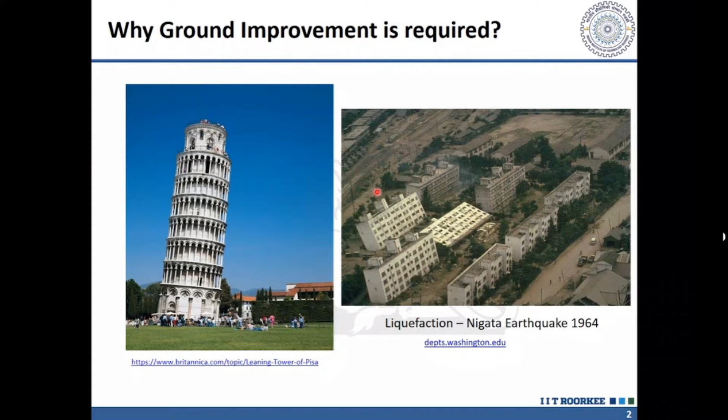We know that in the present day, the best buildable lands are not available. So whatever sites are given to construction engineers are either filled-up sites, low-lying waterlogged areas, wastelands, or creeklands. Another thing is that we are going for high-rise buildings nowadays, so the design loads are high, not only in the case of buildings but otherwise also, and the site is often situated in seismic zones.

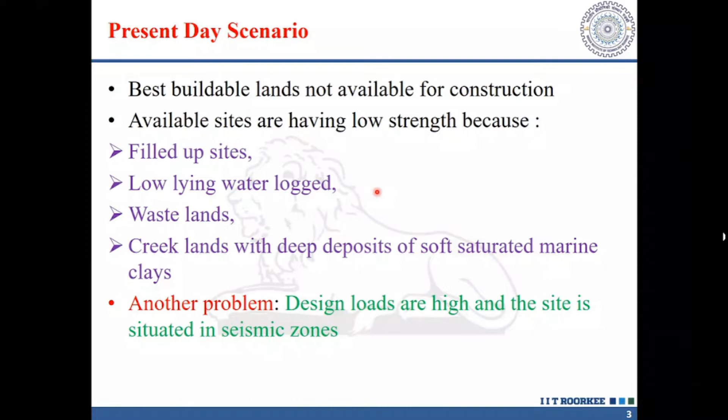So what are the options available to us engineers? Either we remove the poor material at that particular site and replace it with more suitable material, which is going to be expensive, or we bypass that particular site laterally by changing the project's location, or vertically by use of deep foundations. So you will either have to go for deep foundations or avoid that particular location.

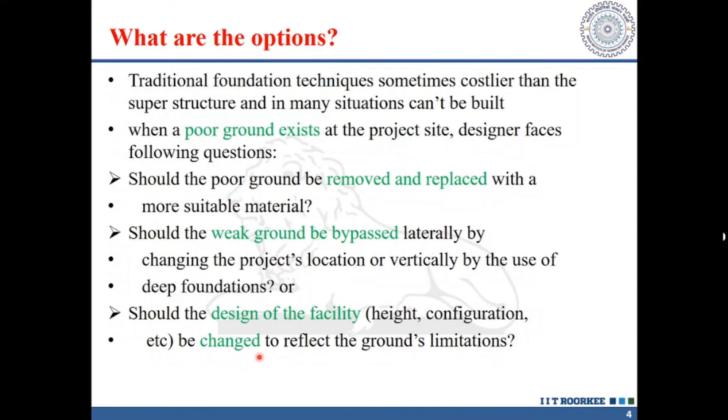And that is not possible because land is not abundantly available, so we will have to construct the structure at the same location allotted to us. Now, should the design of the facility, like height or configuration, be changed to reflect the ground limitations? These are the options available.

But there is another option, which we call ground improvement techniques. That is the fourth option available, and it is to fix the poor ground, meaning improve the properties of the ground and make it suitable for the project needs. So that is the fourth option.

Now, if we are using this fourth option, we will have to decide about the fixing tool. Here, fixing tool means there are a number of options available for improving the ground condition. Out of those options, which particular option should we go for? There are critical issues associated with all the options, because all options cannot be used everywhere—they will depend on the site conditions.

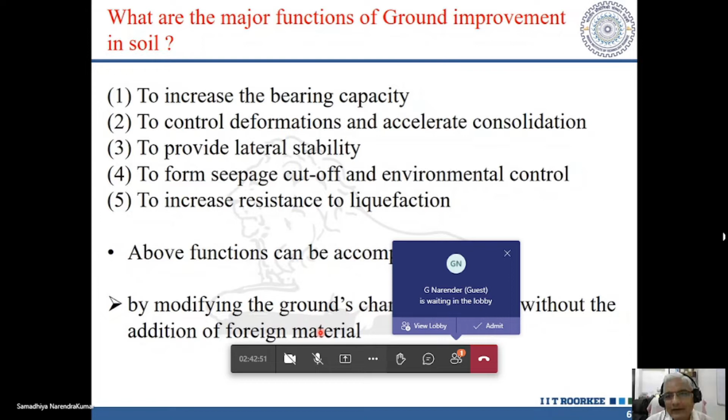There are various methods, and the function of these ground improvement techniques is to increase the bearing capacity of soil, to control deformations and accelerate consolidation, to provide lateral stability, to form seepage cutoff and environmental control, and to increase resistance to liquefaction. This particular FDP is about geotechnical earthquake engineering, and in a major way to increase the resistance to liquefaction.

Now, all these functions can be accomplished by modifying the ground's character. It can be done with or without the addition of foreign material. Sometimes you will have to add foreign material into the ground, or whatever is existing can be improved.

So there are various methods which are available: densification, consolidation, weight reduction, reinforcement, chemical treatment, thermal stabilization, electro treatment, and biotechnical stabilization. Out of these, I will be discussing some of them.

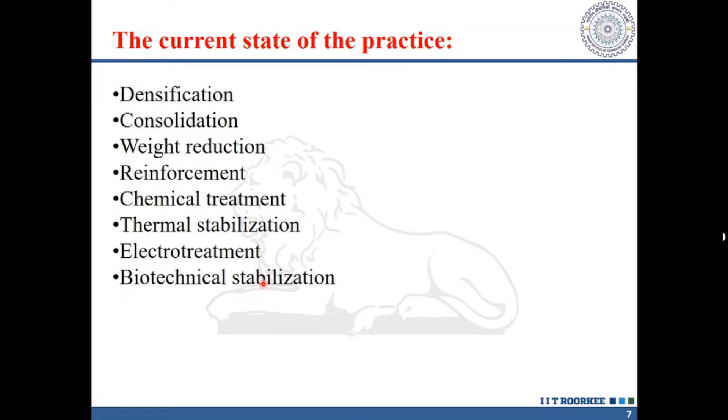Now, the very old method is ground improvement by densification. This is a very old method, and we know about this. We can go for static compaction or vibro compaction, dynamic compaction, or even in the case of loose sands, we can go for blasting or compaction grouting.

With this, the key issues related to densification are mainly the percentage of fines in the soil, because that will decide which particular method should be used, and the ability of the soil to dissipate excess pore water pressure. Especially in the case of compaction grouting, if the soil happens to be soft clay and the permeability is very low, it is quite possible that during compaction grouting this particular soil may fail in shear.

If the excess pore water pressure which has developed is not dissipated, then the energy felt by the soil determines how much compactive effort is required. If there are boulders or utilities and adjacent structures present, then how are you going to densify this particular strata? And aging. So these are some of the key issues.

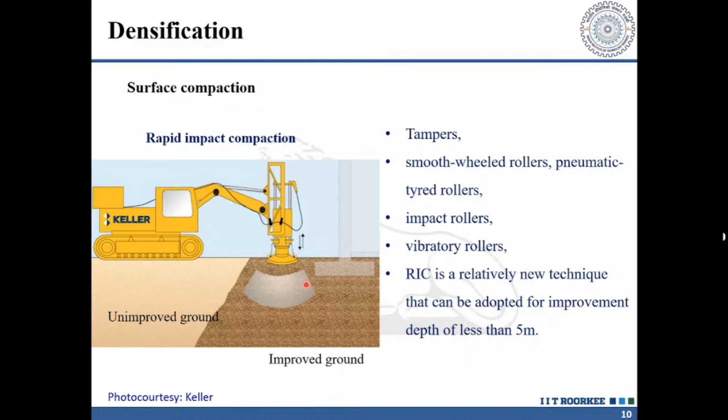Now there is another method which is being used nowadays, especially for shallow depth, that is the rapid impact compaction. It is a relatively new technique that can be adopted for improvement depth of less than 5 meters. So this particular method is also available for surface compaction.

A very important method which is being used nowadays is vibro compaction, which is also termed as vibro flotation. This is nothing but the rearrangement of soil particles into a denser configuration by the use of powerful depth vibrators. Vibrations are imparted to the loose strata, and naturally this is good for, or you can say best for, coarse grained soils, especially loose sands. In this, the combined action of vibration and water saturation is used.

Through the jet, we also add water by jetting arrangements, so loose sand grains come into a compacted state. Vibro compaction is performed with specially designed vibrating probes. I will show you a sketch of the vibrating probe. Both horizontal and vertical modes of vibration have been used in the past.

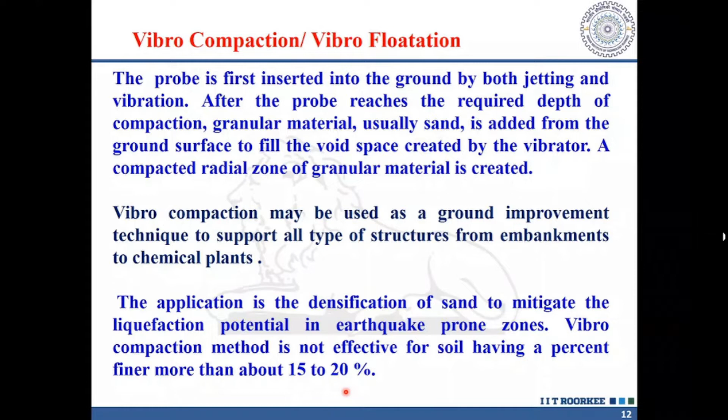So it can be used to support all types of structures, and especially vibro compaction is not effective if the finer particles are more than 15 to 20%. So that is the condition for the densification.

Coarse-grained soils are suitable for treatment by vibro compaction, it increases bearing capacity, reduces settlement, and this is very useful for liquefaction mitigation.

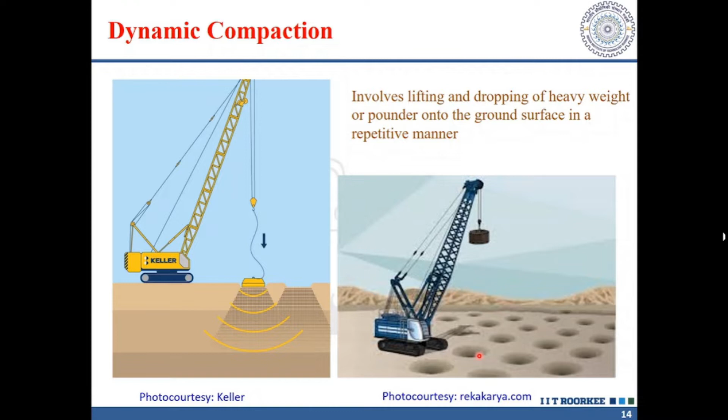Another method is dynamic compaction, especially for loose sandy deposits. It involves lifting and dropping heavy weights or a pounder onto the ground surface in a repetitive manner. Here you can see the impression of this pounder on the ground surface. When it is dropped on this particular strata, vibrations are generated, and because of that a denser configuration is achieved. This method can be used for all types of structures.

It can be used for the foundations of large workshops or storage tanks, even oil storage tanks. It can also be used for the foundations of airport runways, or for the stability of sandbars in offshore applications. So that is about densification.

Another method is consolidation. This can be achieved by preloading with or without vertical drains, but normally we go for preloading with vertical drains. Otherwise the time required to achieve a certain degree of consolidation will be very high. Or we can go for electroosmosis, and nowadays this particular method is being used. I don't have any idea whether it is used in India, but it is being used in several projects abroad.

So with consolidation, key issues associated are stability during surcharge placement. Let us say you have a soft clay deposit and you are placing a surcharge in the form of an embankment or in the form of blocks. It is quite possible that particular stratum may fail, so that stratum should have sufficient strength. Stability during surcharge placement is one of the issues.

Then if you are going for vertical drains, clogging of vertical drains is another issue, so we will have to provide a suitable filter. Then if you are going for vacuum consolidation, maintenance of the vacuum is another issue.

I hope all of you know this case of sand drains. These sand drains are nothing but columns of about 20 to 30 centimeter diameter. They are augured into the ground and then filled with granular material, maybe sand, and then we place a free draining blanket at the top, and then we place this embankment. This embankment may be a permanent embankment for a highway or railway, or it may be for preloading, and then we can remove this particular embankment once.

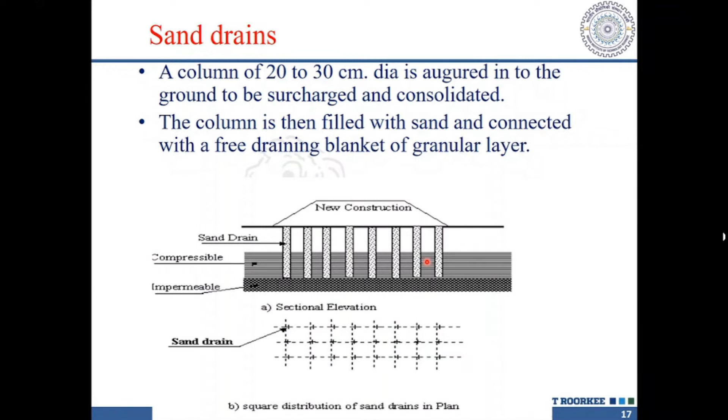So this is how the flow will be taking place. There will be radial flow also, and that water will come out through the drainage blanket which we have provided, to come out of the ground, and you will get a better result.

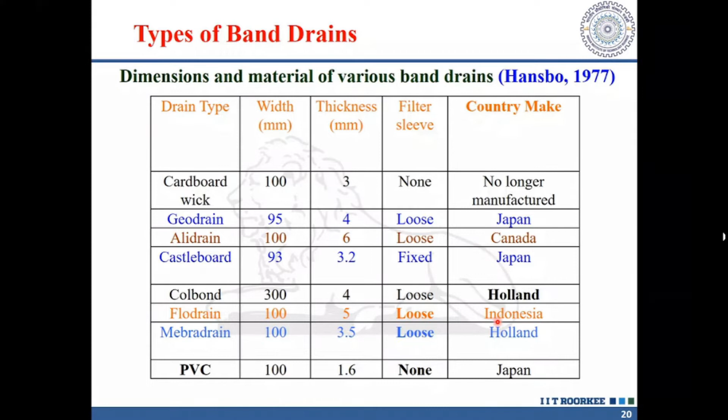In this particular table, the drain types are given, like cardboard wick, geodrain, Alidrain, Castleboard, Colbond, Flodrain, and nowadays we are using PVC. Some dimensions are given, whether a filter sleeve is used, that is also given, and the country where it is made, along with who started first this construction and use of these particular band drains.

A small description of different drains, like sand wicks: these are ready-made small diameter sand drains, pre-packed in a filter stocking. In early days, woven jute canvas was used as a filter stocking, but presently polypropylene, woven or melt-bonded fabrics are used as stockings.

Cardboard drains are inserted into the ground by a mandrel, which is then removed. A channel in the cardboard facilitates the removal of water, making it easy to install, and nowadays specially processed cardboards are available, so they have longer life and are very durable.

Then nowadays we are using PVC, the prefabricated vertical drain. It can be defined as a fabricated material or product consisting of a synthetic filter jacket surrounding a plastic core. Because of their shape, they are also known as band or wick drains. All these details are given in this particular report.

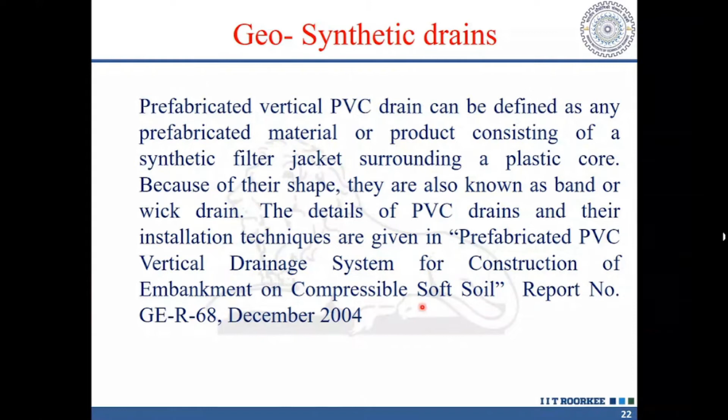Now, the installation process: vertical drains are used where preloading alone shall not be efficient. In that case, we may go for PVC. Vertical drains in soft clay accelerate the primary consolidation of clay since they bring about rapid dissipation of excess pore water pressure.

They do not have a direct effect on secondary compression, but since primary consolidation is completed early, the onset of secondary settlement will also be brought about early. So structures or embankments can be put to use earlier than would otherwise be possible. That is the advantage of PVC.

It is successful in accelerating the rate of flow for fine-grained soils, but they are not so effective in case of organic soils and highly stratified soils, like peat.

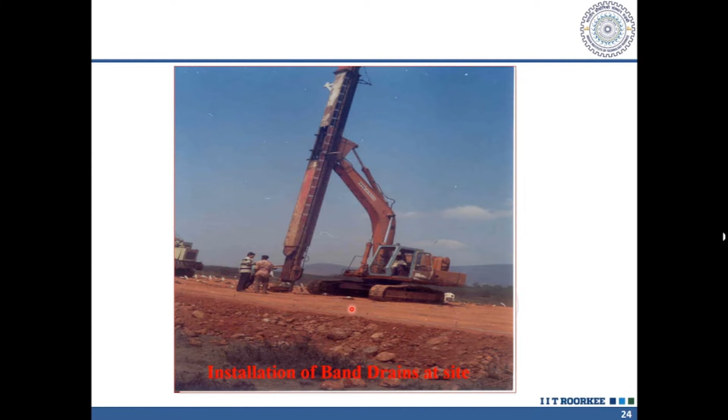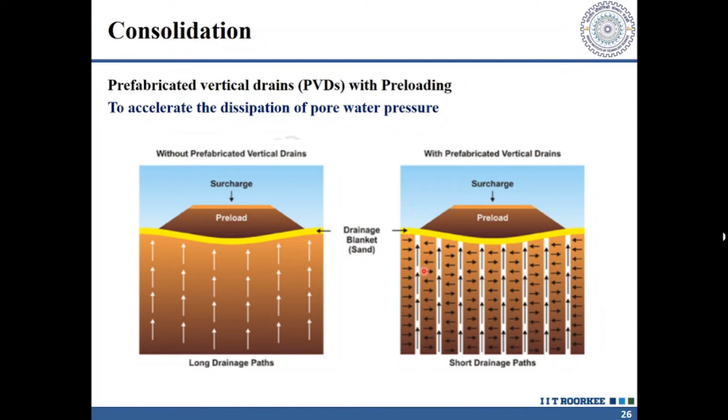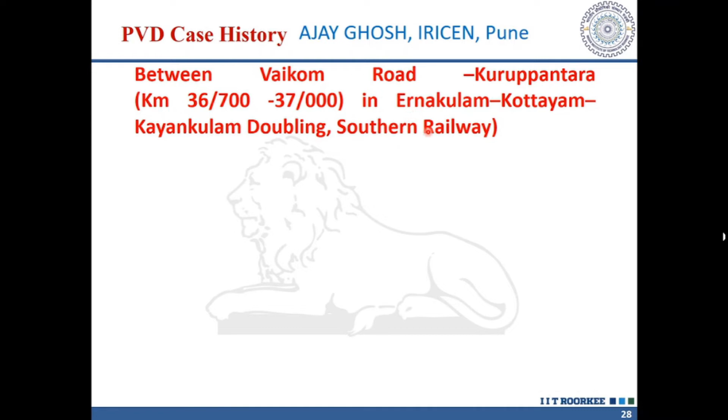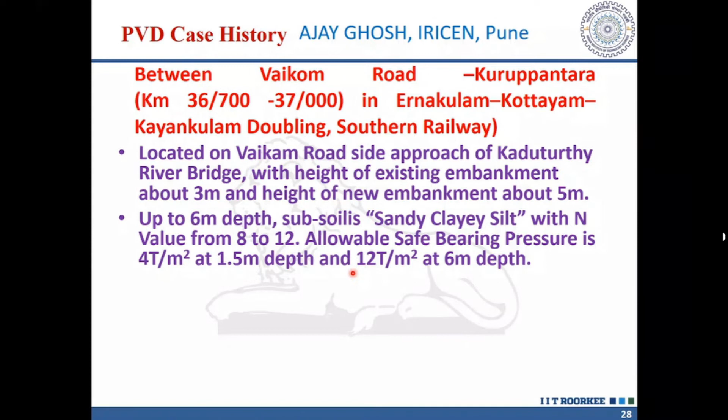This is the case history for an embankment for the Ernakulam-Kottayam doubling railway line in Southern Railway, located on the Vaikom Road side approach of Kaduturthy River Bridge. The existing embankment height was about 3 meters, and another embankment for doubling was to be constructed adjacent to this, having a height of 5 meters. This is the soil strata up to 6 meter depth - subsoil is sandy clayey silt with N values ranging from 8 to 12. Allowable safe bearing pressure is 4 tons per meter square at 1.5 meter depth and 12 tons per meter square at 6 meter depth.

On construction of the full height of the new bank, there was failure of the new bank with heaving of ground on the vacant land. So the fill material was removed completely and technical consultancy was taken from IIT Madras.

It can be triangular pattern, square pattern, or rectangular pattern - this will have to be designed properly. So after PVD installation, they provided drainage filter and laid high strength geotextile at the base.

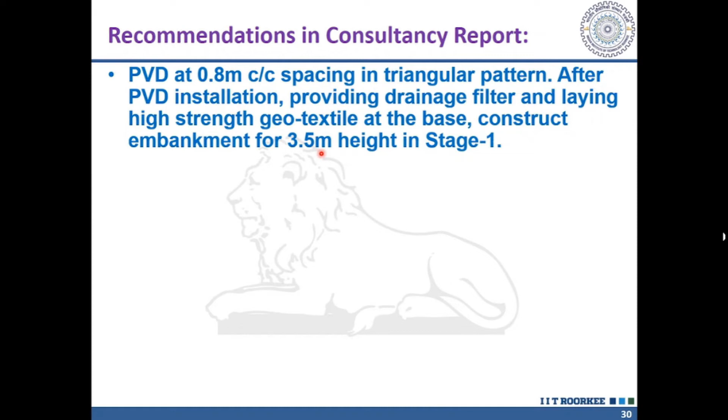They constructed the embankment to 3.5 meters. So out of the total height of 5 meters, they recommended initially constructing up to 3.5 meters in stage 1, and when about 75% consolidation had taken place because of PVDs, estimated in about 1.5 months, they would raise the embankment to final height in stage 2.

Now, how much degree of consolidation is achieved? They had to monitor the actual settlement data and pore pressure data, so they used two instrumentations - platform type settlement gauges and Casagrande piezometers. After this, the 5 meter high embankment was successfully constructed and the doubling was done.

The preloading methods being used can be divided into these two: preloading using fill, or preloading using vacuum pressure, or combined fill and vacuum preloading methods. We have already seen preloading by using fill.

Now, if you are going for vacuum consolidation, these are preferred when the ground is very soft or when the fill surcharge has to be applied in stages, otherwise shear failure of the material will take place. There is no fill, or the use of fill is costly. If suitable material is not available at the site, you will have to import and transport it, which becomes costly. And there is no space on site to place the fill. So in that case, we can go for vacuum consolidation along with the surcharge.

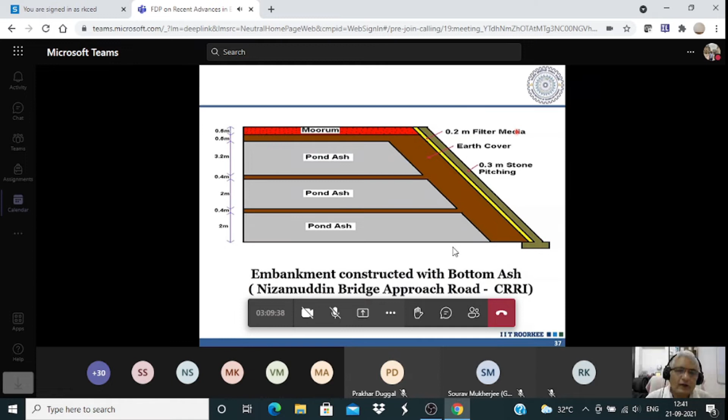The layers include the earth cover, then 0.2 meter filter media, and then stone pitching. So we can make use of this type of lightweight material for construction of embankments, maybe highway embankments, or nowadays

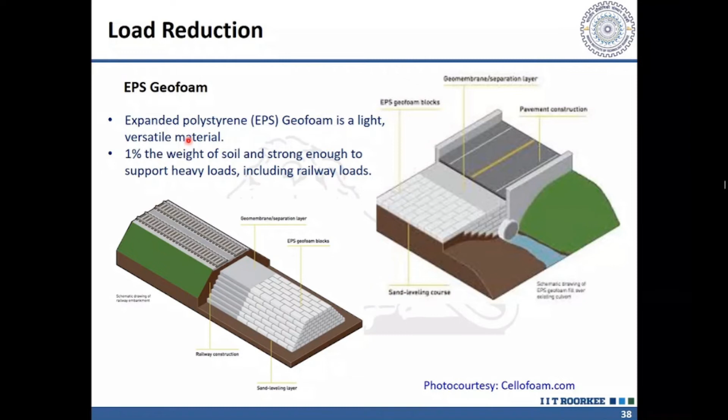this particular material, EPS geofoam, is being used for construction of embankments, for railways, for bridge approaches. This is the expanded polystyrene geofoam. It is a lightweight, versatile material, and its weight is about 1% of the weight of soil if you were to use soil in its place, and it is strong enough to support heavy loads, including railway loads, or you can use it for bridge approaches. So we can make use of this lightweight material.

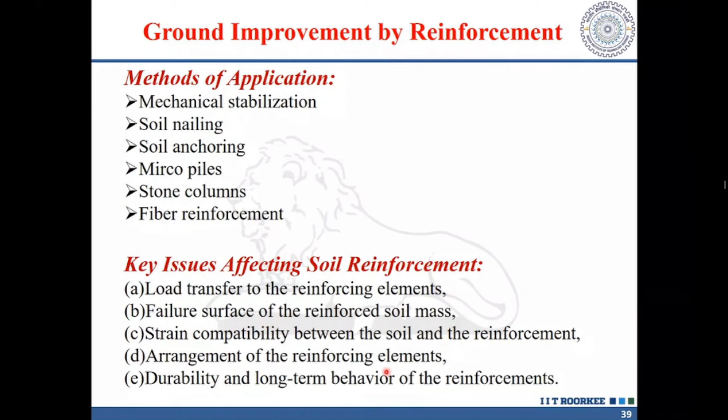Then another ground improvement technique is by reinforcement. The methods of application are mechanical stabilization, reinforcement in the form of nailing, soil anchoring, micropiles, stone columns, or fiber reinforcement. The key issues affecting soil reinforcement are the load transfer mechanism between the soil and the reinforcing elements, the failure surface of the reinforced soil mass and how it will fail, the strain compatibility between soil and reinforcement, the arrangement of reinforcing elements, and durability and long-term behavior.

Now, all over India and almost all the cities, you will find that bridge approaches are being constructed using MSE walls. The concept was given by Vidal in the 60s, and now it is being used all over the world, with a number of MSE walls being constructed.

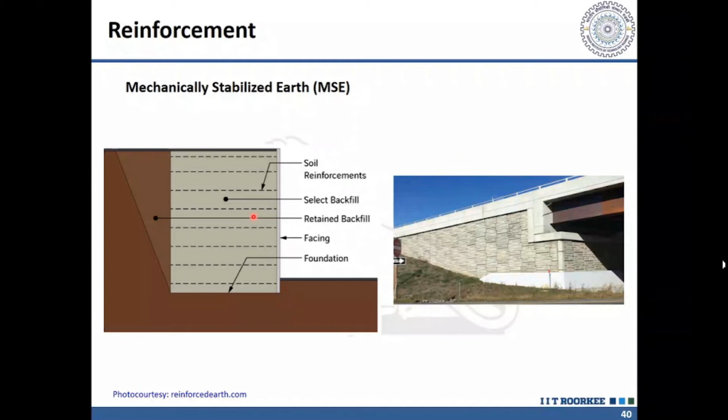So I will not be going into the details of that.

Another technique is soil nailing. Soil nailing is a technique to reinforce and strengthen ground adjacent to an excavation by installing closely spaced steel bars, which are called nails.

Normally in this case construction starts from the top and we go down. The excavation is done in limited heights of maybe 1 to 2 meters, depending upon the type of soil available. It is an effective and economical method of constructing retaining walls for excavation support of hill cuts, bridge abutments, and highways. The nails are subjected to tension, compression, shear, and bending moments.

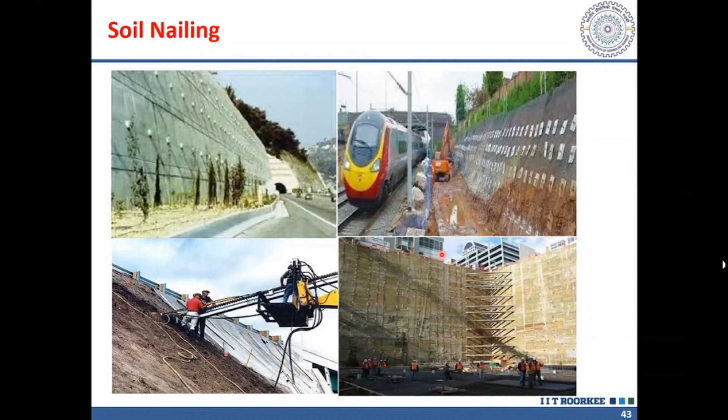It can be attached to the masonry wall if it is being used in the basement for basement protection, or otherwise it can be properly shotcreted also.

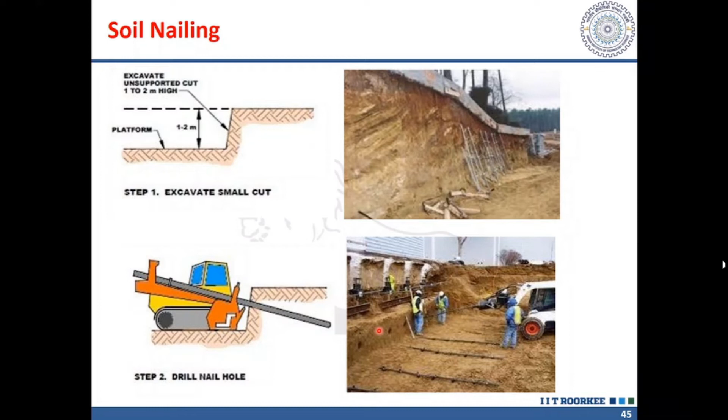On this side, you can see these are the nails which will be inserted into the ground. After that, using this machine, these nails are inserted into the ground, and grouting is done. This is done in steps. Once this process is over, we can place reinforcement, and we can even do the shotcreting also to get a smooth vertical face.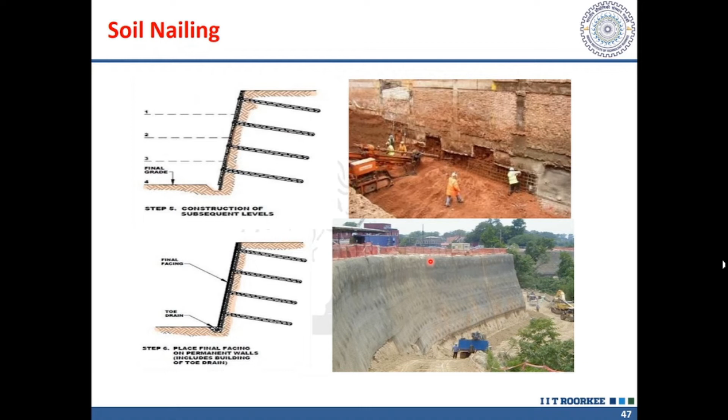This is how it is done, and finally you get this complete soil nailed wall, or soil nailed slope, constructed. Whatever structure is above can be protected well.

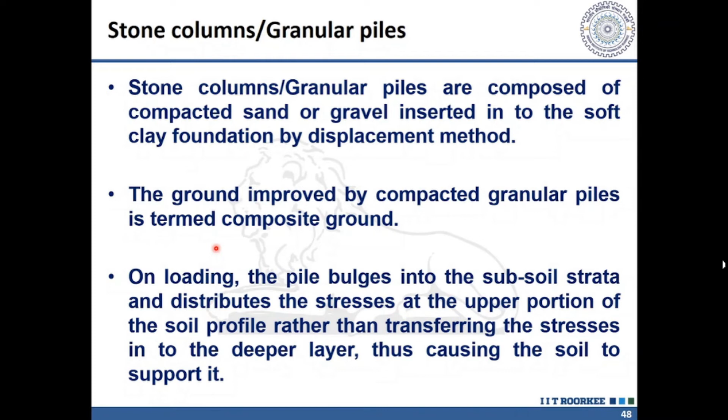Another method is stone columns, which are also termed granular piles. These are composed of compacted sand or gravel inserted into the soft clay foundation by the displacement method. The ground improvement by compacted granular piles is termed as composite ground. On loading, the pile bulges into the subsoil strata and distributes the stresses at the upper portion of the soil profile, rather than transferring the stresses to the deeper layers, like in the case of pile foundations.

Now there will be different types of failures. If we have a long stone column with firm or floating support, you will get bulging at the top, and the resistance or strength is improved by the confining pressure applied from the surrounding material.

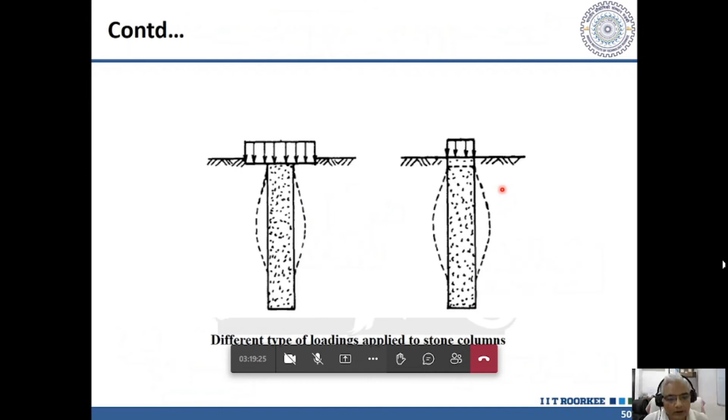Using this, there will be increase in strength. Or it can be a shear failure if you have a short column with rigid base, or it can be punching failure if you have a floating column. Different types of loading can be applied: it can be loaded on a larger area than the diameter of the stone column, or it can be loaded only on the stone column.

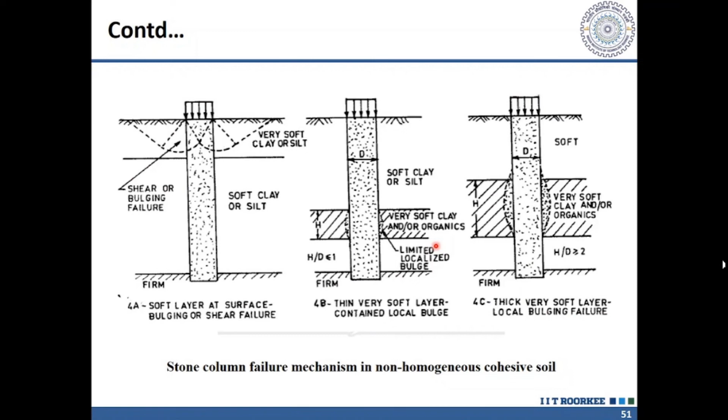These are some other descriptions: if you have very soft soil overlaying soft clay or silt, you will get shear failure. If you have a very soft clay sandwiched between two stronger clays, there will be bulging. So there are various stratifications, and we can use these stone columns in different types of stratification.

These stone columns provide a path for pore pressure dissipation. The material used is stiffer, and it also provides a path for pore pressure reduction and lateral confinement of soft clay layers. So bearing capacity is greatly enhanced.

This may be provided in areas where subsoil layers consist primarily of saturated soft clay more than about 3 to 5 meters thick, and where the required stringent consideration of settlement control cannot be satisfied with conventional removal or replacement of the soft clay. So there we can use it. After stone column treatment, the embankment with non-compressible fill can be constructed to its full height continuously without further stage construction.

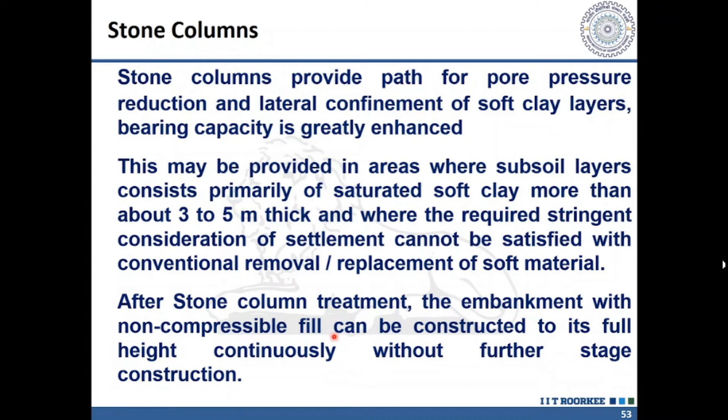So a large portion of the applied load is resisted by the relatively strong stone column, and the remainder by the cohesive soil which is available.

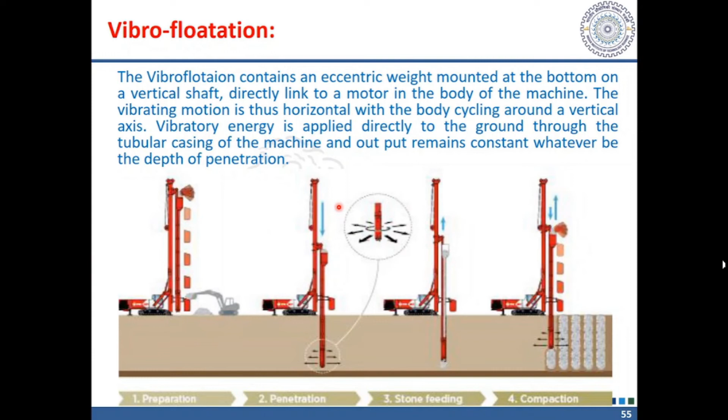Starting from the preparation, then penetration, then we place the granular material and properly compact it. If it is, let us say, a layer sandwiched between two stiff layers, there will be bulging here, otherwise no bulging.

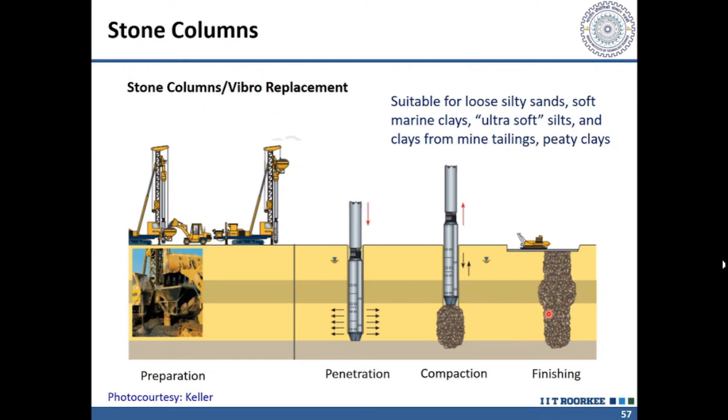Nowadays, we are also going for geotextile encased stone columns. Here in this particular case, it is the ordinary stone column. When you apply the load, there will be bulging of the material because the surrounding material is soft soil.

In the soft soil itself, we can go for encasement, normally geotextile encasement. Now research is being done for geogrid encasement also. So nowadays we are using these geosynthetic encased stone columns too. These control stability, reduce settlement, and speed up construction. They are widely used as columns supporting test embankments on soft clay deposits.

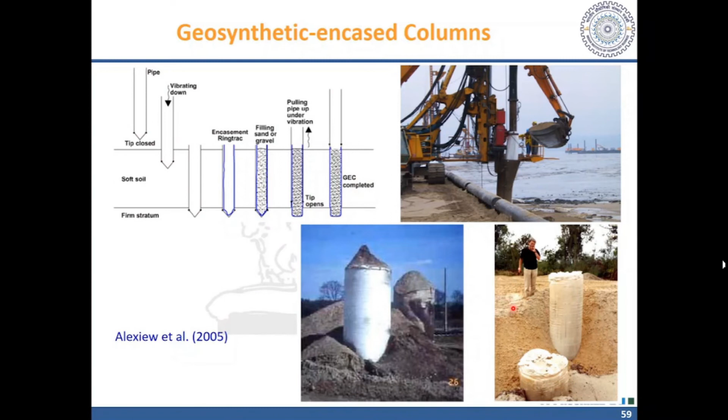That is the encasement. After that, it is filled with sand or gravel and properly compacted. Compaction is done by vibration, and we keep on pulling it out. Finally, you get the GEC completed. So here are two photographs showing how these GECs will look.

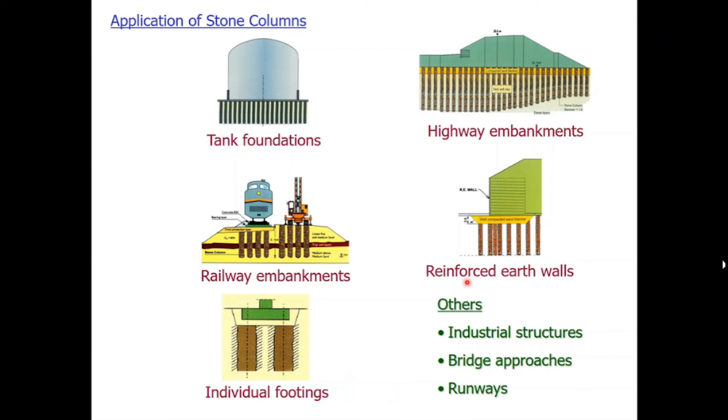We are also using composite piles, combining piles with granular piles. There are various combinations. The applications of stone columns include tank foundations, highway embankments, railway embankments, foundations of reinforced earth walls, and individual footings. So there are various applications of stone columns.

Now, another technique for construction of the stone column is the ramming technique. It was suggested by CBRI, Central Building Research Institute, and they have used this particular method. It is a very simple method. First boring is done, then material is placed in layers and properly compacted, and you get a compacted stone column.

Then there are sand compaction piles. The procedure is driving a casing into the soft ground and compacting the sand pile. In place of the granular material, we can simply use sand, drive the casing, and then complete the construction.

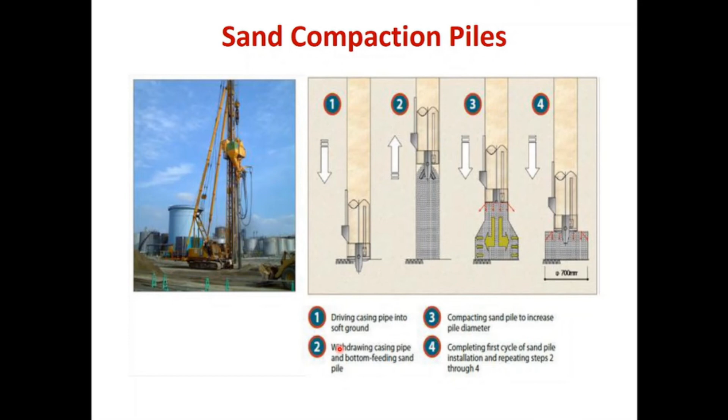So I will be discussing this case study and example, which is a site in Jorhat, Assam. The groundwater table was at 1 meter below the existing ground surface. There were intermittent layers of clay and sand. The applied load intensity was 10 ton per meter square. The proposed foundation was a raft of size 20 meter by 20 meter.

Depth of placement of foundation was 4 meters. Saturated unit weight of the soil was 19 kilonewton per meter cube, void ratio e 0.8, compression index 0.2, and undrained shear strength was 35 kilonewton per meter square. The total thickness of the layer was 18 meters.

Foundation has to be placed at 4 meter below the ground surface. The load to be applied is 10 ton per meter square, on a raft of 20 by 20 meter. The calculation of settlement was done based on the value of compression index, void ratio, and thickness of layers.

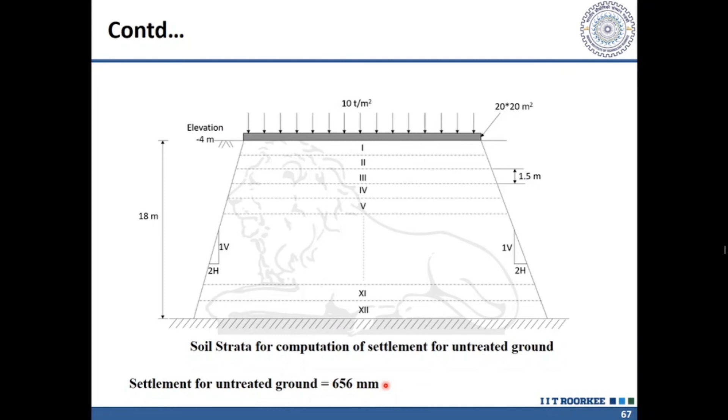All these layers were divided into 12 layers, 1.5 meter thick, and the consolidation settlement was estimated as 656 millimeter. So for that, design for stone column was done. Diameter 0.6 meter, spacing 1.2 meter, and length was 18 meter. Capacity based on bulging was determined as 8.68 tons.

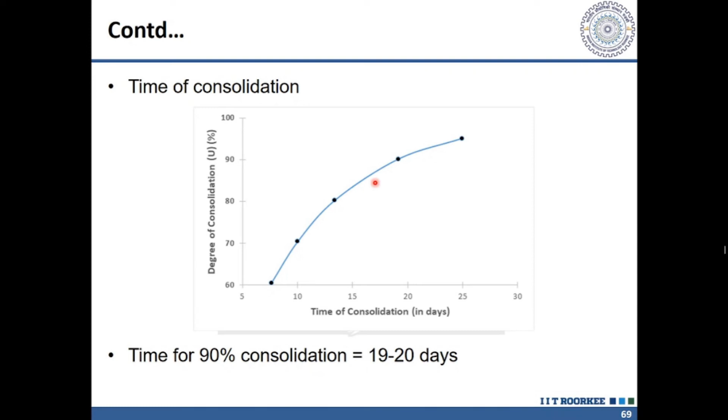Based on surcharge effect, it was 3.12, and capacity provided by the intervening soil was 8.33 tons. So the total safe load carrying capacity of the stone column was 20 tons. With the stone columns, the time required for 90% consolidation was reduced to about 19 to 20 days.

So after 20 days, the consolidation which has taken place is 590.4 millimeter, and remaining consolidation after 20 days will be only 65.6 millimeter, which is less than the permissible limit. In view of this, it is concluded that when ground is treated with stone columns, about 590 millimeter settlement will take place before the construction, and therefore post-construction settlement is within the permissible limit.

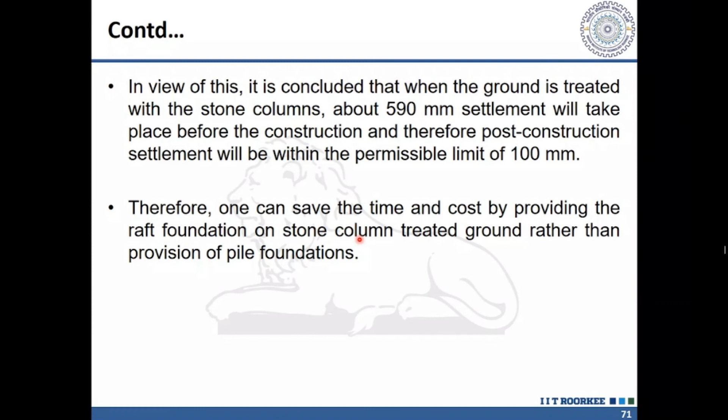So one can save time and cost by providing the raft foundation on stone columns in place of going for pile foundations.

So again, in the stone column, a blanket is laid over the top of the stone column, compacted to a relative density of 75 to 80%. Thickness is about 0.5 meter.

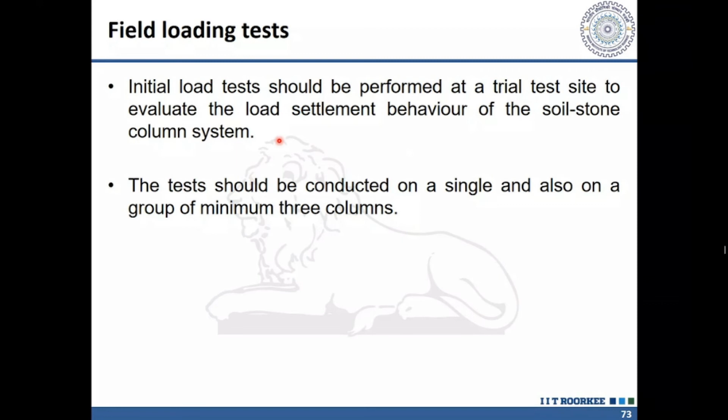But in stone columns also, we suggest that we should go for the loading test, like we go for the pile load test. Initial load test should be performed at a trial test site to evaluate the load settlement characteristics, and the test should be conducted on a single column and also on a group of minimum 3 columns.

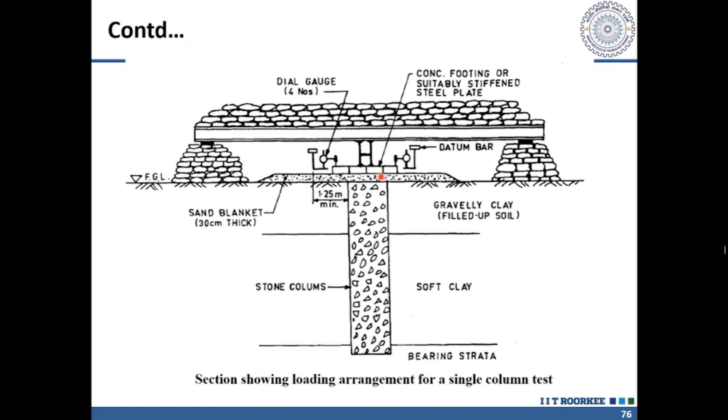So this is the arrangement given in IS code, for the test to be conducted on a single column or on a group of columns. This is how the test is conducted. Here you have got the stone column and a sand blanket, 30 centimeter thick, well compacted, is placed. And finally, as we conduct the plate load test, we conduct this column test.

This 30 centimeter thickness is minimum. Now, in case of high water table, water level during test should be maintained at the footing base level by dewatering. So this is the procedure given for the load test.

The kentledge should be minimum 1.3 times the maximum test load. Load settlement observations should be taken up to 1.5 times the design load, and the stage of loading is given when the settlement is less than 0.05 millimeter per hour. Load test should be considered acceptable if settlement is 10 to 12 millimeter at design load for single column, and 25 to 30 millimeter for a group.

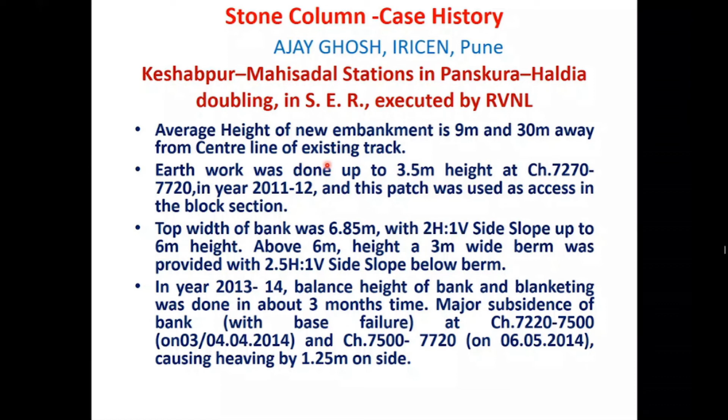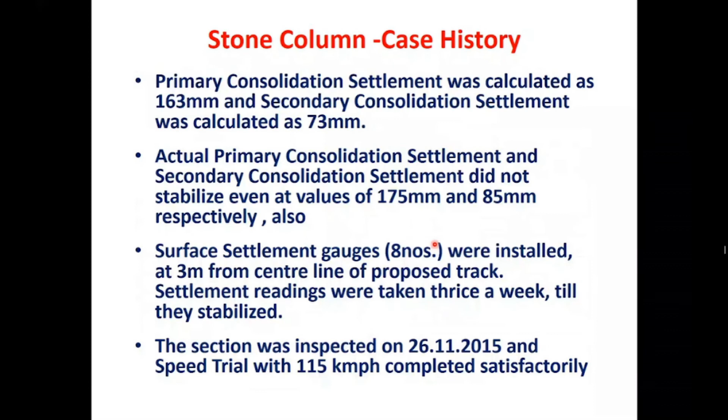Now, there is another case history, but I will not go into the details since already 1 hour is over. This is another case history given by Ajay Ghosh. In that particular case, it was not possible to go for PVDs, so they went for stone columns, and they found that with the use of stone columns, they could construct the new embankment. So this is the final construction.

Now another method we use is ground improvement by geosynthetics. Geosynthetics is a generic term encompassing all the polymeric materials used in contact with soil or rock, or any other geotechnical material in civil engineering applications. There are various purposes like reinforcement, drainage, filtration, and erosion control. There are a number of products available, starting from geotextile up to geosynthetic clay liner.

So geotextiles are sheet-like materials made up of natural or synthetic yarn. This is a photograph showing the geosynthetic. These are flexible and permeable, with appearance similar to regular fabric. Now these are classified as woven, non-woven, knitted, or stitch bonded geotextile.

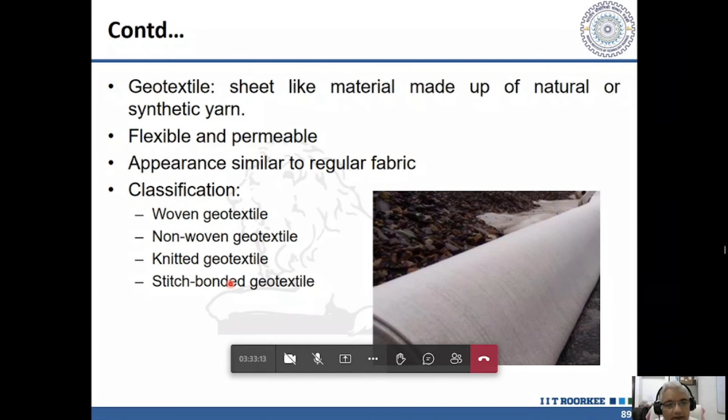Then we have got geogrids. These geogrids are used either in foundations or in pavements. There are various types of geogrids available - 1D, 2D, or maybe 3D geogrids are also available. Here these are the biplanar, triplanar geonets, or other types of geonets. So we can use, in place of geogrids, different geonets. Geonets are different from geogrids.

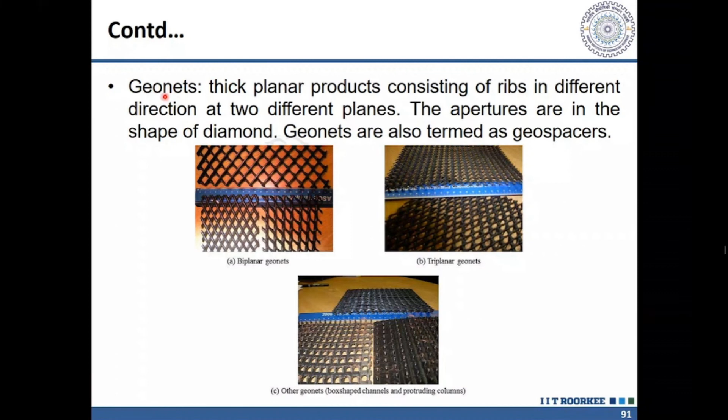Now geomembrane. This geomembrane is an impermeable sheet made up of one or more synthetic materials. They are flexible in nature. Due to its extremely low permeability properties, it is used as a fluid barrier. If you have heard the name of the Malana hydroelectric project in Himachal Pradesh, very near Kullu, they have used this geomembrane for creating the reservoir.

Then we use geocomposites, meaning if you are using more than one form in combination of geosynthetics, then these are called geocomposites. So we can make use of geogrid and geotextile together, or a prefabricated vertical drain, that is also a geocomposite.

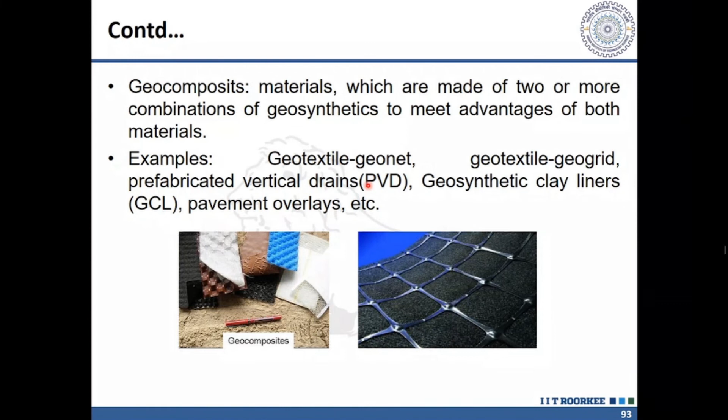Geosynthetic clay liner: in this, the bentonite clay layer is sandwiched between thick non-woven geotextile. Geotextile encased clay liners are stitched or needle punched through the bentonite core to give higher shear resistance, and when hydrated, they are effective as a barrier. So it is often used in conjunction with the geomembrane.

The prefabricated vertical drain I have already explained. Then another is the geocell. This geocell is used in the construction of roads, especially where we have got very poor soil conditions. These are nothing but three-dimensional honeycombed structures formed by joining polymeric sheet strips in a cellular manner.

Now the pockets of the geocell are filled. You can either fabricate it at the site, or fabricated material is also available. You simply spread it on the ground. The geocell helps in spreading the applied loads over a large area and provides excellent support even under cyclic load. So this is how the construction of the geocell is done.

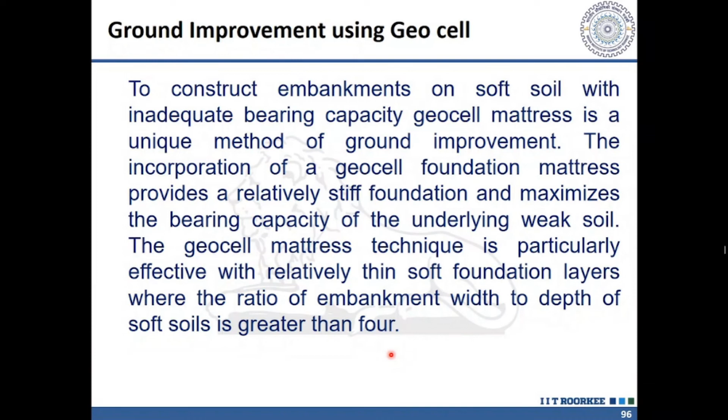To construct embankments on soft soil with inadequate bearing capacity, geocell mattress is a unique method of ground improvement. The incorporation of a geocell foundation provides a relatively stiff foundation. I will not read all of this procedure. The incorporation of geocell mattress creates an embankment foundation with the following characteristics: a rough interface between the mattress and the soil foundation due to granular fill, and a stiff platform to ensure an even distribution of load.

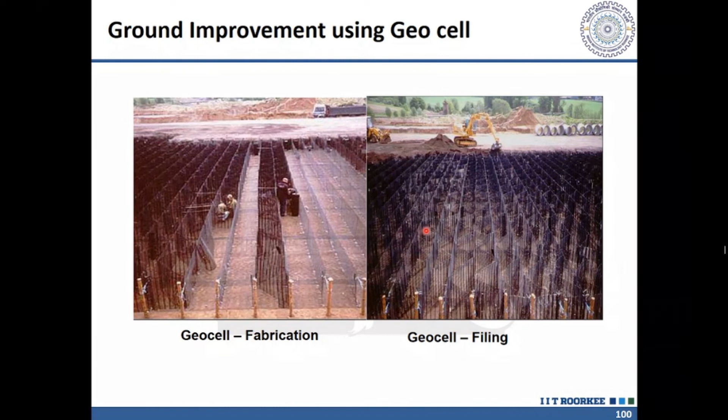So these geocells are used as a ground improvement technique. The geocell can be constructed in the field or fabricated, and then granular material is filled in these boxes and properly compacted. Or you can go for prefabricated.

Then geopipes is another material, which is a perforated or solid wall polymeric pipe placed beneath the ground surface and backfilled, and the water coming into the pipe can be drained out. Geofoam is a low density network of closed gas-filled cells made by expansion of polystyrene foams. These foams can be used for the approaches, as well as a filler material behind the retaining wall. Once you do that, the earth pressure is reduced considerably, and you can go for a thinner section.

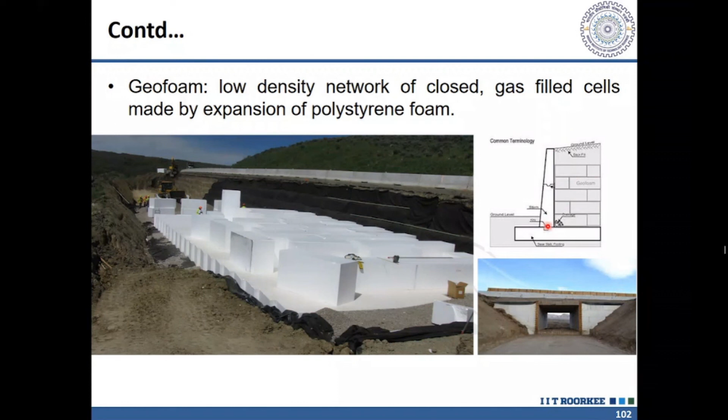Then geotube. These geotubes are used especially for disposing of material which is high in chemical content, etc. So these geotubes are also used near the seashore.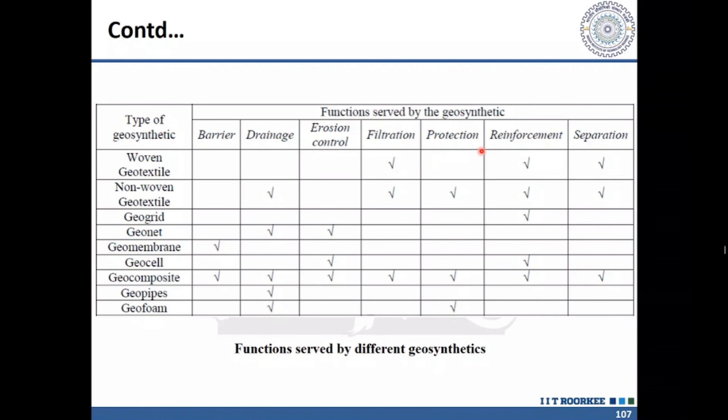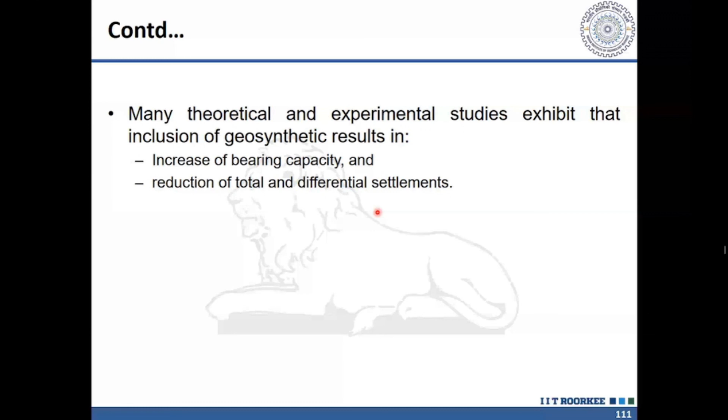So these are the roles of geosynthetic, like it can be used as a separator material, so this is the separator, or for filtration. So many theoretical and experimental studies exhibit that inclusion of geosynthetic results in an increase of bearing capacity and reduction of total and differential settlement.

So this is one of the case studies for GeoGrid reinforced granular pad foundation, for the waterfront quays in Hamilton Harbor. These were constructed by placing fill within a perimeter steel sheet pile bulkhead. Two 33-meter diameter liquid storage tanks were to be constructed on the site. The stored liquid applied a load intensity of 120 kilopascal. Based on borehole data developed in an initial geotechnical investigation of the site, it was recommended that the tank loadings be supported on either stone columns or end-bearing pile foundations.

The cost of these foundation systems was prohibitive to the development. So additional fieldwork consisting of 3 soundings with a flat plate dilatometer was carried out to better define the geotechnical properties of the soil profile. Using this data, a foundation design was prepared, consisting of construction of a GeoGrid reinforced granular pad. Post-construction monitoring of settlement of the tank foundation showed that settlement of the foundation was within tolerable limits.

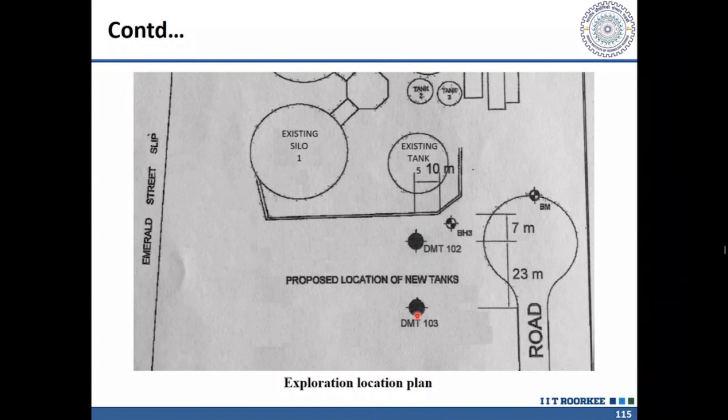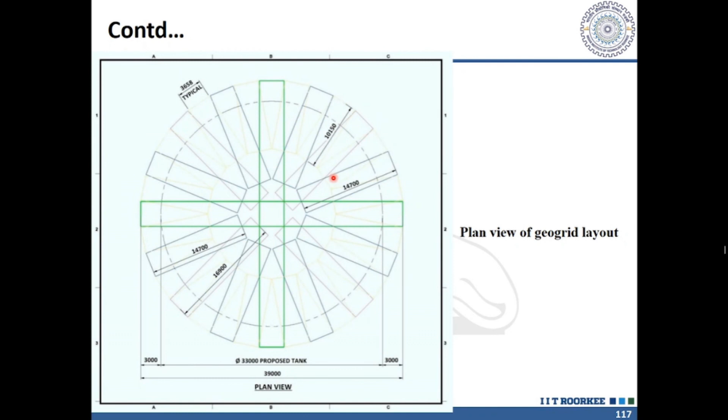So the construction of an engineered pad of reinforced granular fill above layers of relatively weak compressible fill and native soil resulted in only moderately differential settlement, which was well within the tolerable limits. And by using this particular method, there was a lot of benefit.

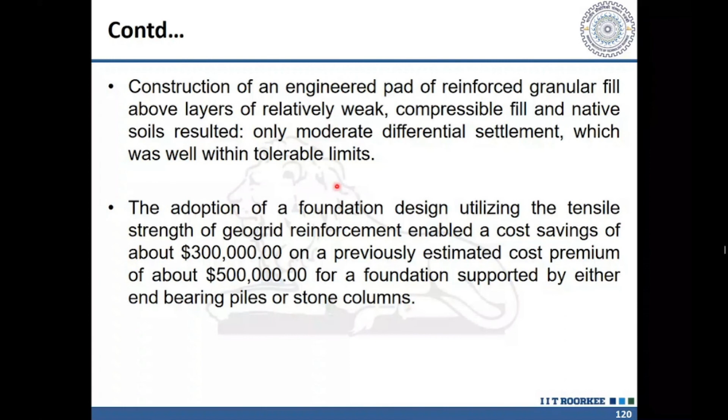Then we have got ground improvement by chemical treatment. I will go a little fast now. These methods are permeation grouting or jet grouting, deep soil mixing. Nowadays we are going for deep soil mixing, especially in Singapore. This particular method is very effective also, and it is very popular. Lime columns, earlier we used to go for lime columns or maybe fracture grouting also.

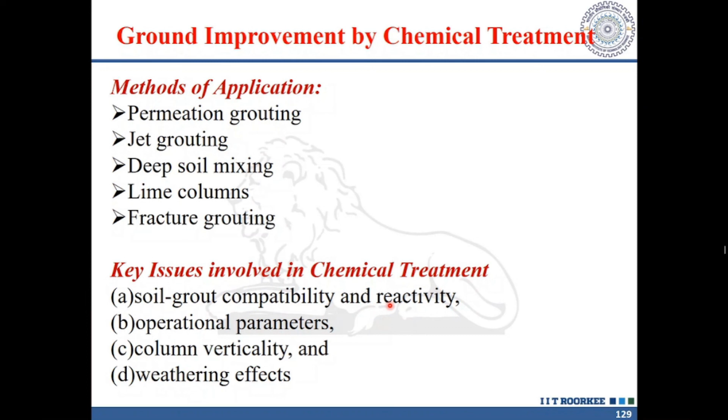So the key issues involved in chemical treatment are soil grout compatibility and reactivity, operational parameters, column verticality, and weathering effects. So injecting or adding admixtures such as cement or lime slurry to the soil in terms of permeation, compaction, or jet grouting. So it fills voids, increases compressive strength, increases the modulus, increases the tensile strength, and forms the seepage cutoff.

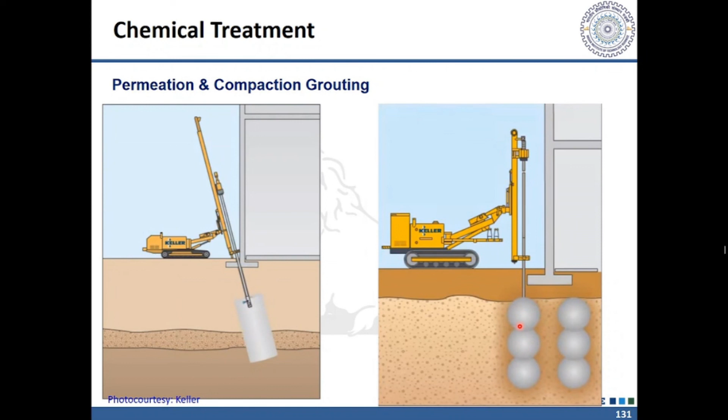Now this is how the chemical treatment is being done. Here is the photograph of the permeation and compaction grouting. Now if you have got the granular material like this, then it creates a barrier to the groundwater flow, and it is also used as the underpinning foundation. Now if you are going for compaction grouting, this will displace the material, so it will get compacted, and you have got a solid stiff type material.

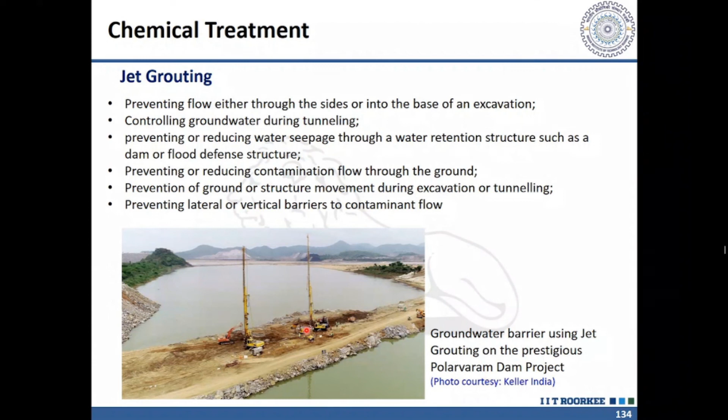Now this is one of the case studies, by which the groundwater barrier using jet grouting was done on the Polavaram Dam project. Another is the deep soil mixing. Again, I will not be going into the details. So there are different applications of deep soil mixing.

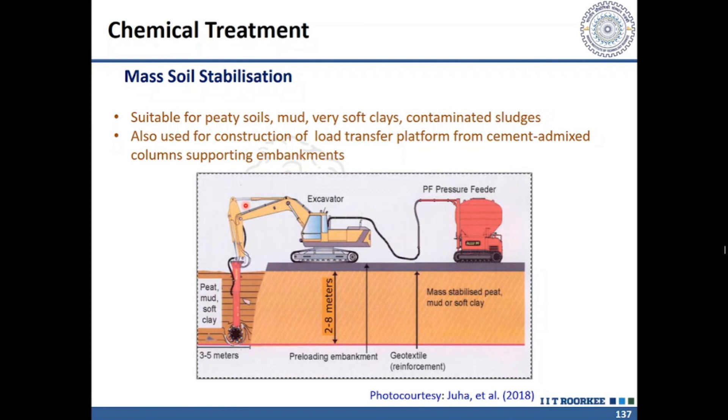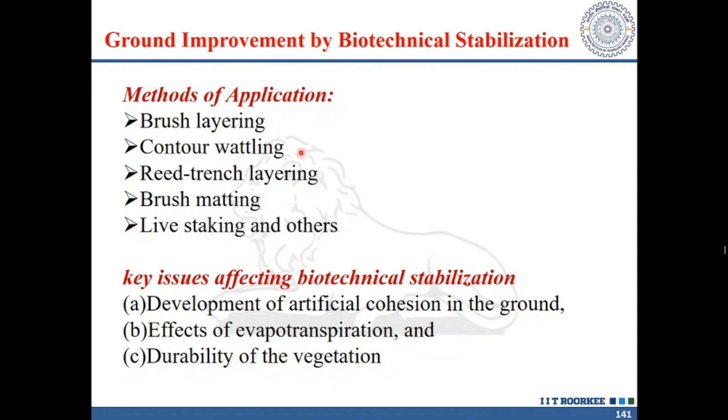Now you can go for chemical treatment also, especially for peats. Or electro treatment, like ground freezing or vitrification. Then biotechnical stabilization, especially for the protection of slopes. Now this is the different ground improvement methods which are available and which can be used for particular types of soil. As I said, all the methods cannot be used for all types of soils. For some of these soils, different methods can be used.

Okay, so with this, I complete my presentation. Although I have got a few more slides also after this, I will not be going into the details of those.

Participants may write the question or query to me as well as Mr. Rohit Kumar, and we will reply to you. And thank you very much, sir. Thank you very much, sir. You have touched all the dimensions related to ground improvement, and especially you have very nicely presented field testing and some case studies related to Jorhat and other studies. Thank you very much, sir.